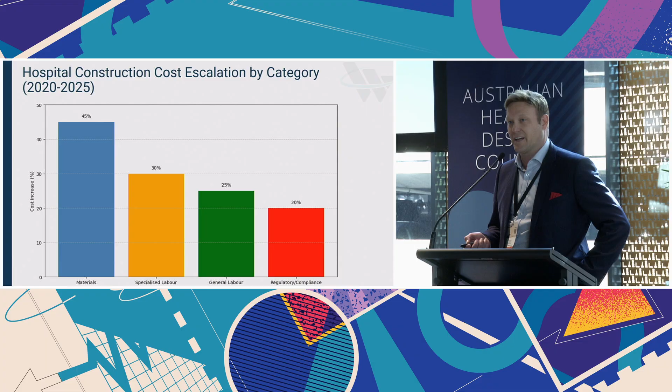I thought I'd share this data as background. You can see what's happening to our material costs, up almost 50%. Our labor costs in certain states around Australia, we're hearing up to 15% year on year in certain trades. Just think on that for a second. A summary for everybody: materials, specialized labor, and so on. If we look at the next 5 years to 2030, it's not going to get any better. That was pre-pandemic levels to today, and we're expecting another 50% surge in materials in the next 5 years.

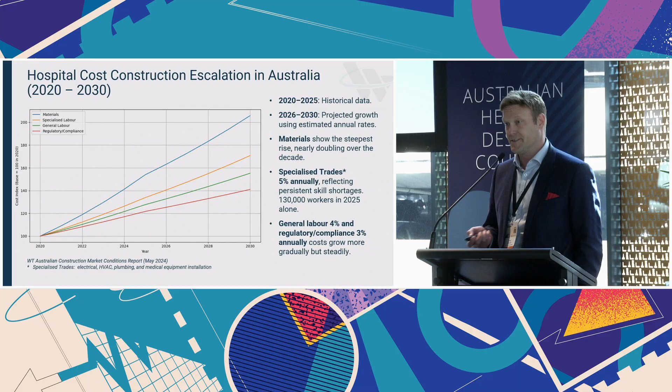So what's the best way to address these rising cost pressures? One of the first things the research showed, and I encourage you guys to get out there and research as well, is to embrace modular and standardized construction. So what is it? It's when we build things or components off-site, they're repeatable, and we efficiently and high-quality assemble them on-site.

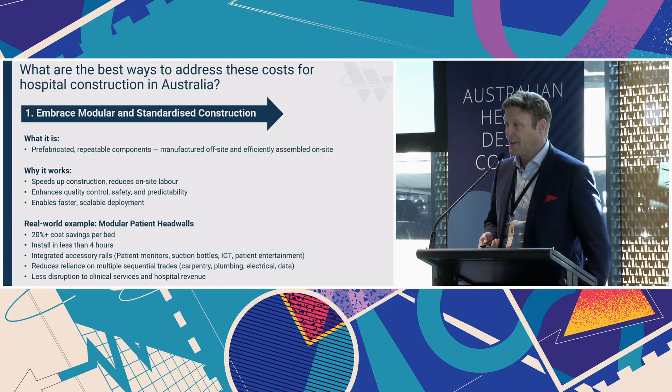These are normally built trade after trade. Someone comes in and runs the medical gas pipe work down, the electrician fits off all the electrical, then we have nurse call and data comms, and then a joiner comes in and builds a bespoke joinery package. This isn't new, it's not innovative, but for some reason we haven't embraced it in Australia despite 30 years of building modular in Europe and North America. We're still doing it bespoke, project by project.

Another thing we can do is smart design and adaptable templates, and these are proven templates, not first time ever used. An example I'll give you here is around modular operating room ceilings.

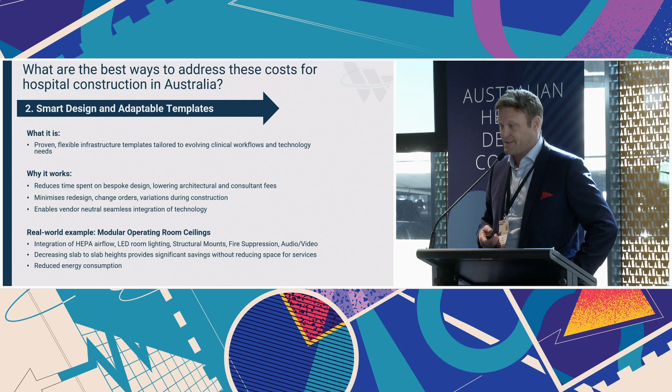And this is how we currently build operating theaters in Australia, or at least 95% of the time still. They're stick-built, they're conventional. We need some sort of structural from the slab down.

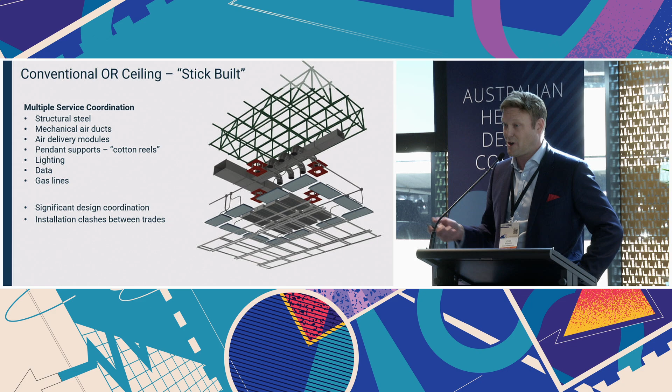We have to have multiple mechanical ductworks, and second here, we have to have cotton reels. We have to have individual lighting systems between 12 and 24 lighting fixtures. And there's often, project after project, clashes in design, clashes in trades. We see a HEPA filter with an equipment ceiling cover going over it by a quarter because it wasn't coordinated properly, and so on.

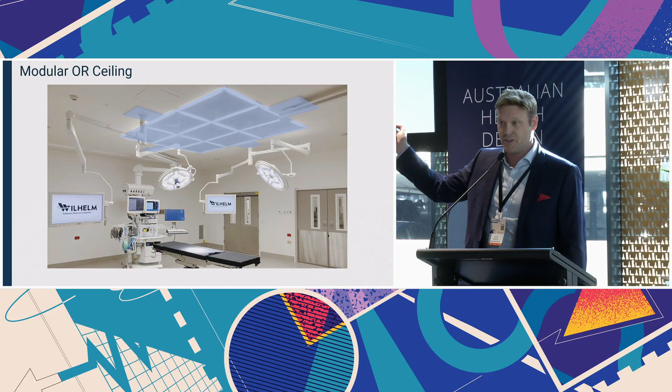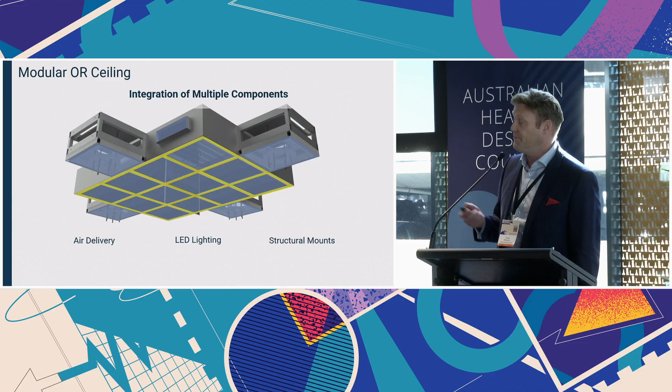And so a solution to all that is the modular ceiling. For those of you who don't know, that's the blue shade I just highlighted there in the ceiling. What it does is it actually provides a number of things - it doesn't just provide the HEPA filtered air delivery, but it does the room lighting, all the structural mounts, and this is a very basic concept. It could be the structural mounts for hybrid operating theaters, cath labs, and so on as well. You can even do fire suppression for renovation projects and the audio and video.

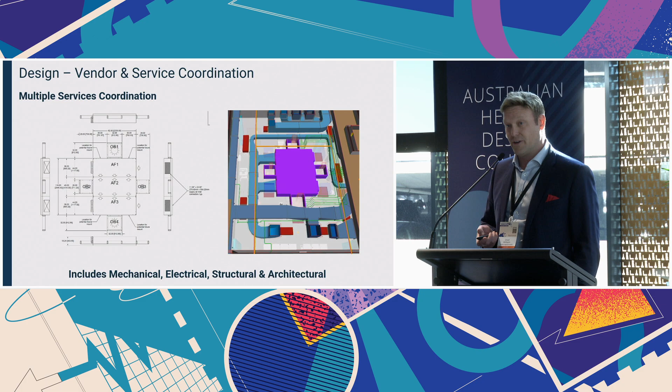So what it actually does up front is all your vendor and service coordination. So instead of having 8 to 10 duct connections for a multi-diffuser array, you can have between 1 and 2 ducts. All your wiring is pre-done in the factory, so it includes mechanical, structural, and electrical all in a single package.

You also know your structural calculations up front - your loads and reactions - before you even go and calculate your slabs, whether it's post-tension or using more of the modular components and so on. You know all that in advance. We just need to know what we're hanging, and in some of the more complicated things, whether we're doing a biplane, a single plane, and so on.

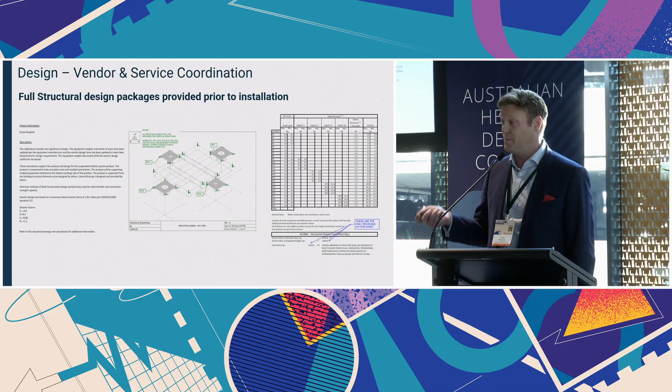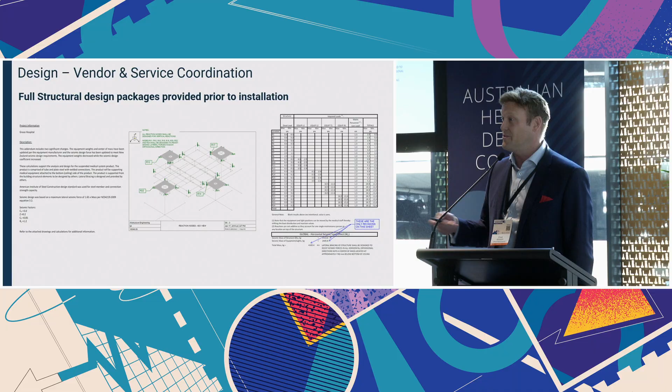And also, for those in the procurement side of things, you can steam ahead and go off and build your theater because you can hang anybody's pendant or light. So it's all pre-calculated, vendor neutral, it doesn't matter. All your lighting calculations are done up front.

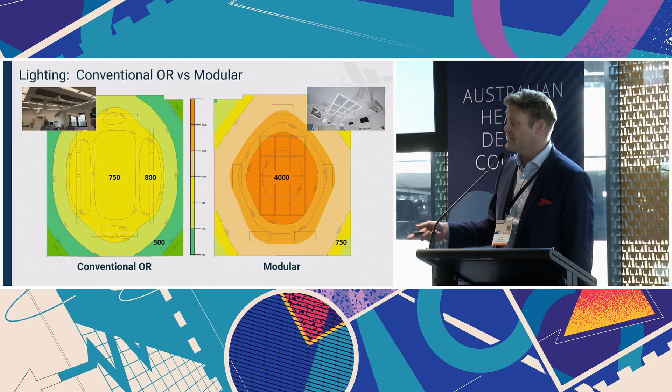What you see on the left is conventional lighting with all the different fixtures. What you see on the right is obviously a lot greater lighting. It's amazing how much the surgeons and the people that work in that room actually appreciate a brighter room than what the guidelines actually call for. Now, these are obviously dimmable - you don't have to be working that bright and so on.

Another thing to consider - I absolutely loved the presentation before, faster, better, cheaper. This is something to consider when you're doing your master plans and schematic designs - this is called the interstitial space. I'm working on a hospital project right now with 5.5 meters slab to slab, okay? But standard in Australia, I think everybody would agree with me, is 4.5 to 4.8. So why do we have 4.5? What's the rationale behind driving that from hospital project to hospital project?

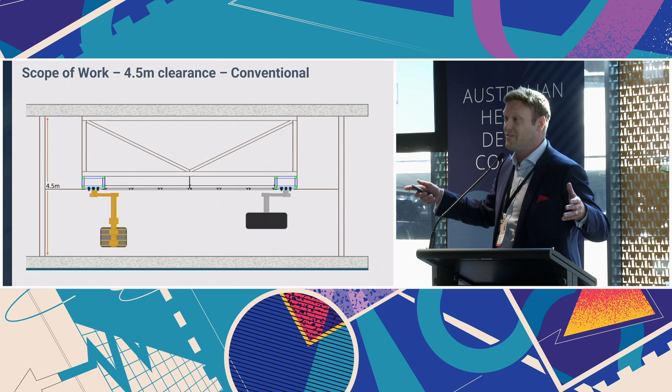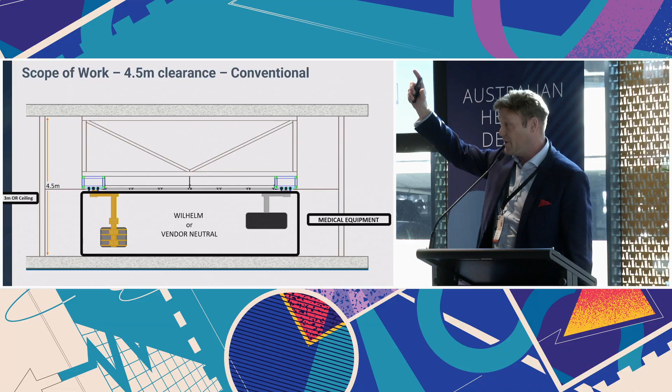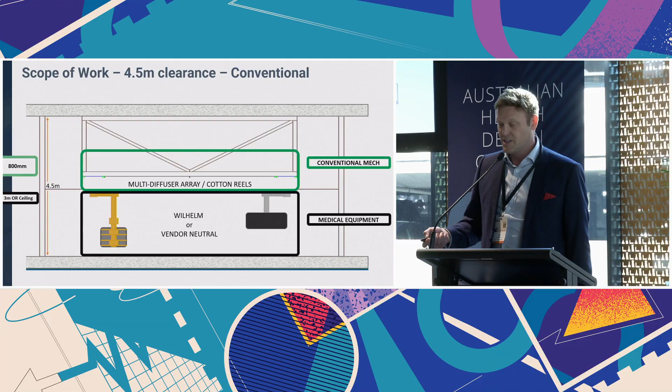And really what it is, it's the services requirement. The builder needs so much space to rough in all the services in your hot floors, okay? So it's usually about 600-700 mil they ask for. And the reason why they need that 600-700 mil, or 4.5, is because the conventional mechanical systems are usually around 800, 900 - a lot of the systems, a lot of the boxes. So what does that leave? That leaves that 700 mil for the ducts and the power and all these different things above.

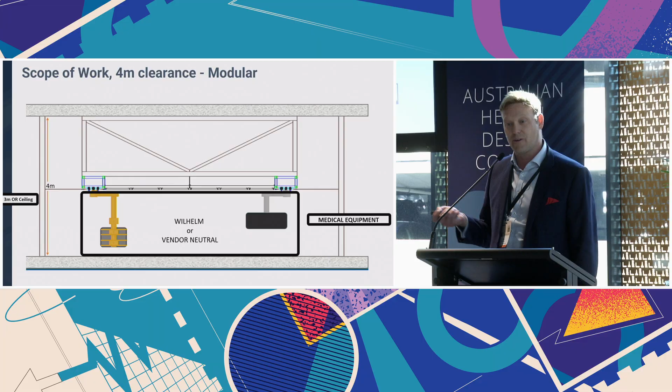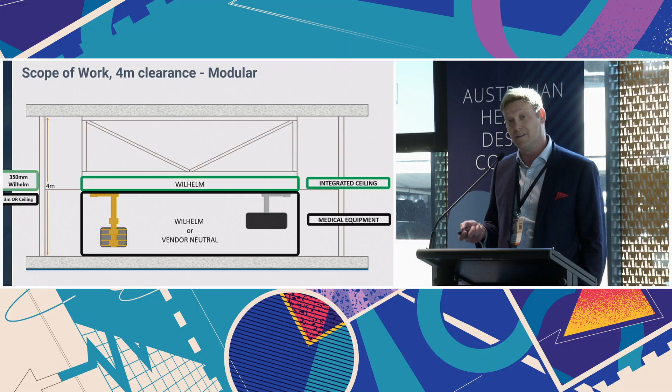But what happens if there was a better way? What happens if we could actually decrease that floor to 4 meters, or by half a meter? Let's just call it half a meter for argument's sake. And the reason why you can do that now is because technology exists that are higher performing systems that can be built in as little as 300 mil, standard's 350, which still gives the services consultants their 600-700 mil above to do their services.

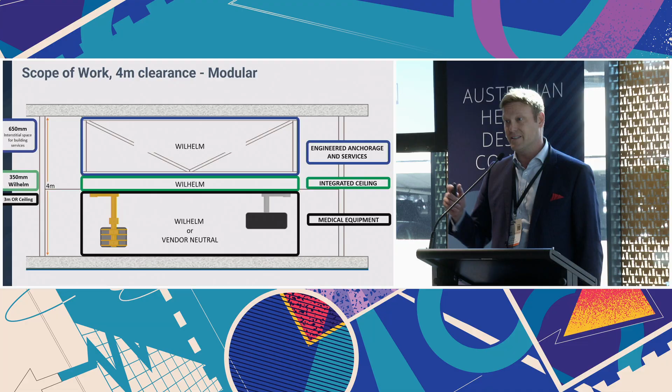Now, some of the towers that we're working on with some of the builders - if you shaved a half a meter off your building, how many millions of dollars would you save on your project? Less facade, less glass, less building materials, more sustainable building, yet you haven't compromised the services requirement for the other trades and services.

Something to think about: the operating theater, people don't realize this, but it's still the number one place where people get infections in hospitals. Surgical site infections happen in the operating theater. Despite all the hand washing and everything we're doing, they stubbornly remain at a very similar rate if you look at the data in Australian hospitals.

One of the reasons is we've got a wide variety of guidelines in this country. What we do in WA is different than Queensland, different in New South Wales, different in Victoria, and so on. I've had the privilege of being part of over 1,000 operating theater projects in this country, and even when they're the same group, oftentimes you find a completely different mechanical design, even though they're built at the same time. So you're paying for that design again, and you're actually paying for a wide variety of performance.

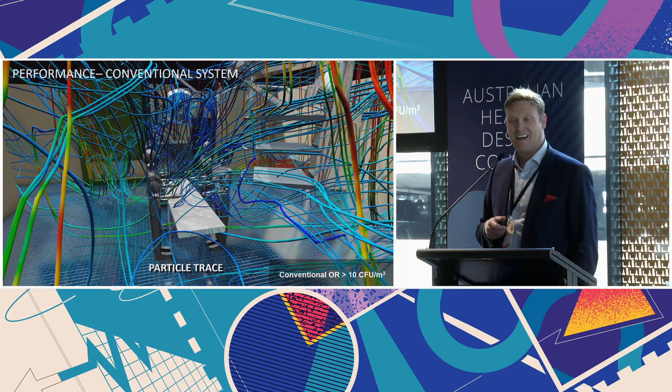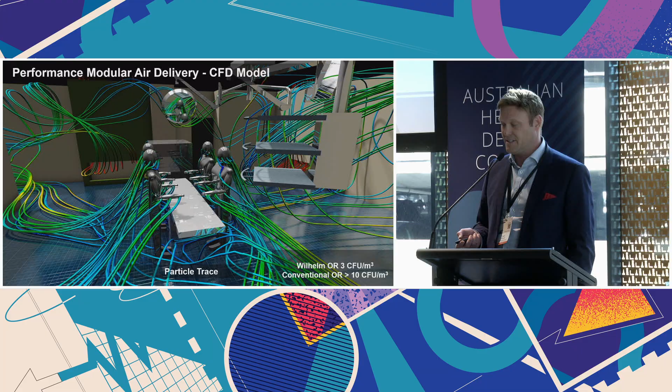If you look at that theater there, if you run a CFD model through it, that's actually how it performs, and that meets the Australian Health Facility Guidelines, 10 CFUs per cubic meter, which is actually 3.5 million particles. We heard from Ben earlier. 3.5 million particles per cubic meter in the sterile field, with the patient on the operating table, actually meets the current guidelines. Versus there is technology out here with the same modular systems, that's how the particles can perform, 1,000 times less particles in the sterile field, independently assessed by multiple companies throughout the country.

The third point I want you to remember is sustainable, energy-efficient systems. We heard a lot about that today, how important it is to build a resilient country and so on. I'm not going to go through all that, but obviously it lowers operational costs.

People don't know, but the operating theater is the highest energy consumer in the hospital. And it actually gets even a lot worse if you go up to far north Queensland when you're dealing with things like high humidity, versus down in Adelaide.

I'm going to give you an example here: two different operating theaters. We had the university, a private hospital customer, and they asked how much energy would we save if we went modular versus conventional. Here's two operating theaters built in Adelaide a couple years ago. The mechanical and electricians came in and installed devices to collect data over a 6-month period. They ran a report, and what they found, well, the reason we have to do it in the same town is because you need the same temperature, humidity, and weather patterns. So this is in Adelaide.

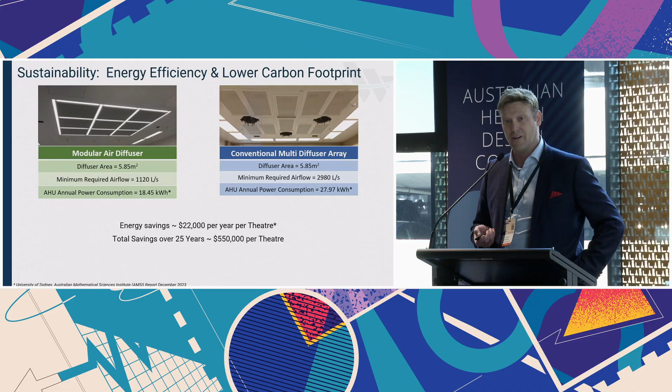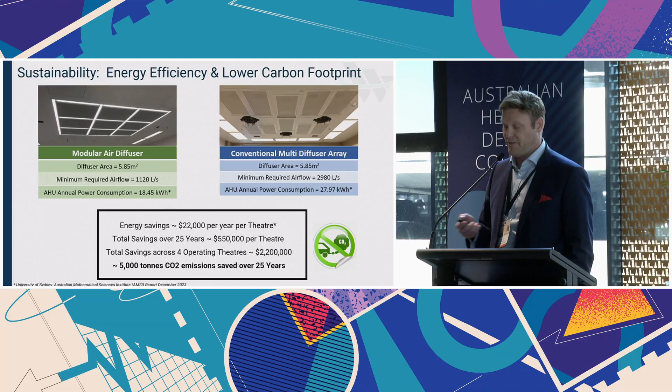I was told it would probably be 3 times the savings if it was far north Queensland. But between those two hospitals, exact same size air diffuser, one had 10 HEPA filters, one had 9, but the exact same air diffuser: $22,000 a year. That was 3 years ago. Energy savings over 25 years, over $500,000 of savings. At 4 theaters, $2.2 million, saving over 5,000 tons of CO2 emissions. Now if you were to scale that across Queensland, say building 100 operating theaters over the next 5 years, you've got a significant reduction in your carbon footprint while providing a better performing system.

The next thing I wanted to talk about briefly is really challenging convention. The reason I say that is we invest heavily in what I call the front door of the hospital, and it's amazing what we're actually doing these days. They're like shopping centers when you come in there. And they should be, they're places of healing and hope and places of community and so on.

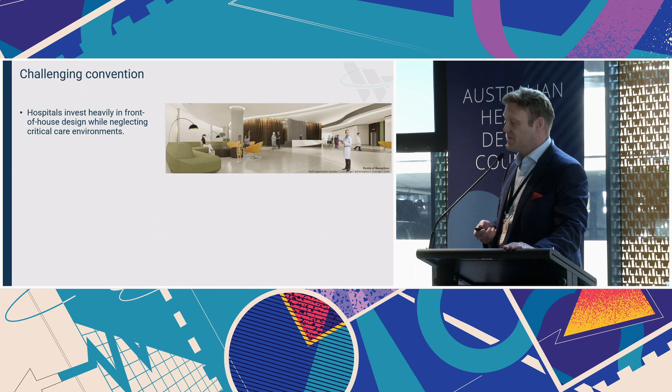But for many patients, and this is what I've learned from the surgeons and anesthetists I work very closely with, the operating room is now the front door for many, many patients. The reason I say that is with the change of patients coming in and having joint replacements and going home in 1 to 2 days now, patients are walking into the operating theater.

There's no anesthetic bay, so what do you think they remember in their time of greatest anxiety? The operating theater. They're actually talking to the surgeon, the anesthetist, the scrub nurse, the anesthetic nurse before they go under. It's a very, very memorable place for them.

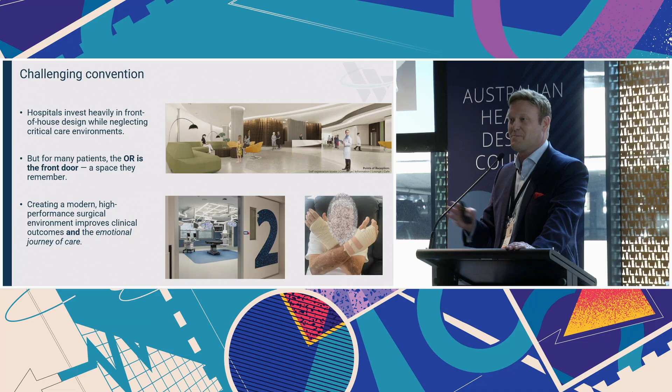And this is a true story. I've actually been twice on the plane in the last six weeks, just sitting by people that had surgery, believe it or not, in that operating theater. Never met them before a day in my life. They were just telling me one guy had his hip replaced, one had his knee replaced. And they said, frequent flyers, because I guess when you start getting your joints replaced, it tends to be hip, knee. So these patients had actually had multiple surgeries in multiple hospitals, and they're telling me how amazing this experience was at this particular hospital, and how memorable it was, from how it looked so clean, how bright, and how they were treated, and so on.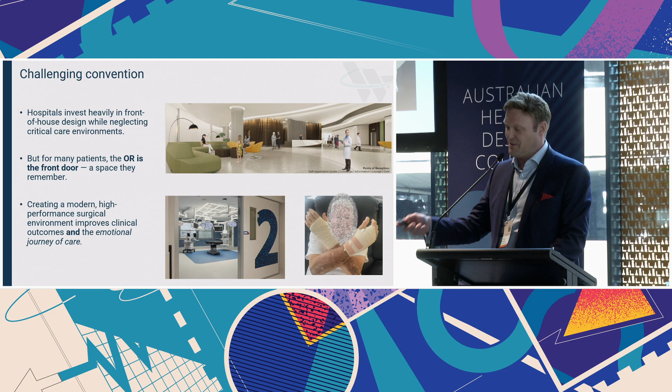And that picture back here was actually from one of the patients that was a friend of a friend that actually called someone that works for me. And the same thing, they were just like, had never actually been in something that looked so amazing. So these places are actually memorable.

And as you can see, there's nothing hanging on the wall. There's nothing that you can get dust behind. There's no cupboards that you have to clean or so on. Everything's very clean. And the other thing is, this operating theater will last for the next 30 years.

I've had the privilege of working with a large tertiary hospital that was built amazingly 12 years ago. But guess what? 12 years later, they need to refresh everything. You know how disruptive that is for being the main tertiary hospital for a community, to shut down your service, to have to redo the vinyl on the walls, the floors, and everything like that. Massive impact on the waiting list, and also the cost of that as well, especially if you're in the private sector when it comes to your revenue.

So these theaters, as we know, these glass windows here, they will not age. They'll always look brand new. There's another perspective for you. Everything built out of glass and corian, and they will not crack. We've now got 800 theaters installed globally around the world with not one crack, and it comes with a lifetime guarantee of 30 years.

So, but what's the value position? Because we've had to say it faster, better, cheaper, right? So yes, it will still cost you a little bit more up front, but as soon as you do one renovation, you're in the black. And that's before you measure any of the disruption to clinical services, the length of stay on wait lists and so on.

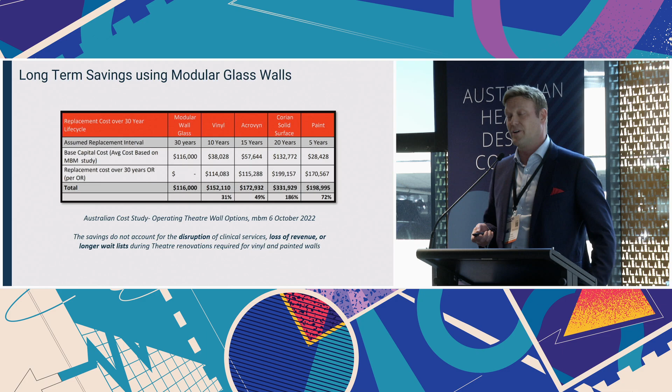And we've heard a lot of wonderful things today, and I do hope that I get invited back to stand up here in a year or two with the architects that were part of this design process for these hospitals, because we now are building theaters using the works of art and imagery, where we now have an operating theater of the Kimberleys. We got another one of the forest. We got another one of the beach.

Because a lot of times the people that work in these environments, they work in windowless rooms. I mean, thankfully here we got windows in theaters, but not always, depends on the design. But working in these environments for 12 hours, working on very complicated cases, when this might be life or death some of these times, you got to think of how other people feel in these environments as well. And so we really want to look after the people that work in these environments every day. We heard it's hard to recruit staff, nurses, doctors in regional communities, and so on. If we create the best environment so they can do the best that they can achieve in, then I think that will help in that regard.